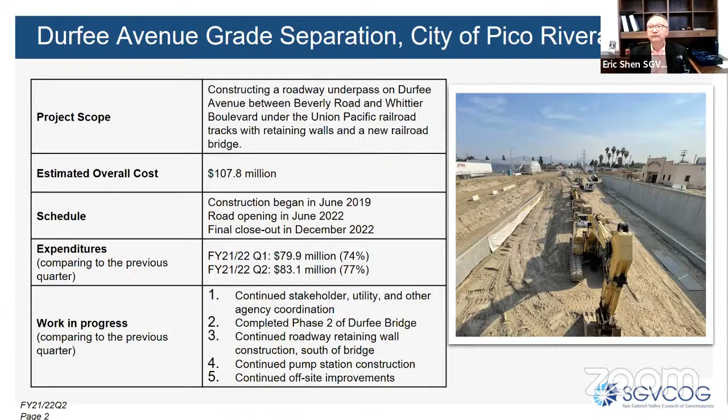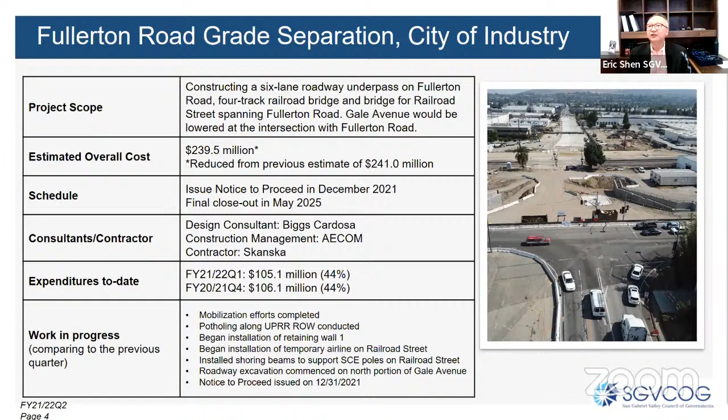Oh, actually, that is my last report. So with that, I'll be glad to answer any questions you may have. Otherwise, this item is for receive and file.

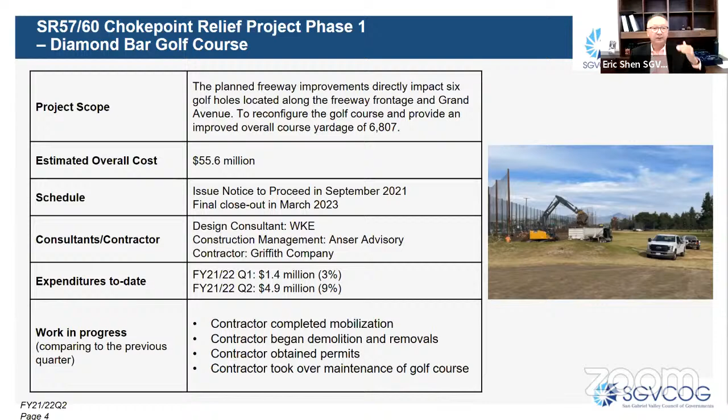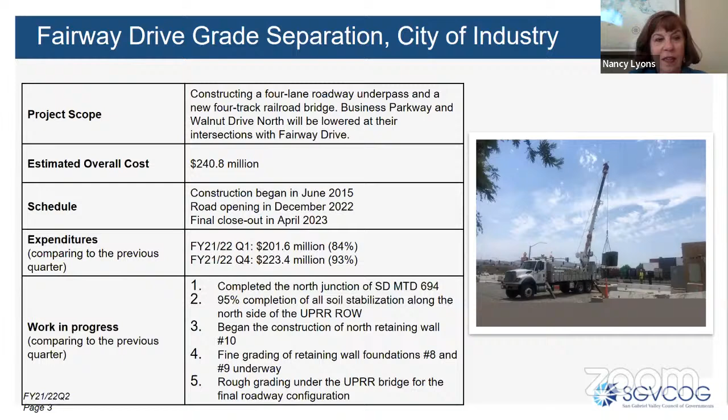Certainly, certainly. Thank you very much for the comments. All right, I see no other hands up. Does anybody else have any questions on this? No.

I will ask if on Fairway Drive it might be time for a site visit, since we are close and we love site visits. We'd like to see it, so perhaps we can take a look at that before the weather gets too hot. We will definitely take into consideration. I will ask Charlotte to work with you on your schedule and with our new project manager. We love to showcase our progress, to give you the assurance that big, important work is being done under your leadership, so we'll come back to you with some suggested dates and times. Very good, I think the committee would enjoy that.

And then if we could go on to item 8. The next item is on the quarterly mitigation monitor report. Staff has provided you with our regular monitoring as well as the tracking on the activities. In the interest of time, I will be glad to answer any questions you may have. Otherwise, this item is for receive and file.

Are there any questions? Diana, you still have your hand up. I'm thinking you just didn't lower it, is that right? I'm done, sorry. Okay, thank you so much.

Yes, let's go ahead then to the monthly report from you. Thank you, Chair Lyons. I would like to mention, in addition to the written director's monthly report, I would like to just emphasize that...

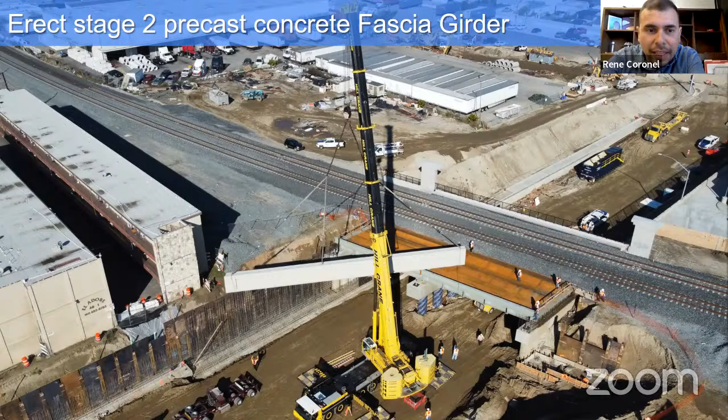After that, we just have to backfill and do the lettering for the city of Pico Rivera. Next slide.

In this photo, we are pouring concrete for the retaining wall, stem wall. Once we pour the concrete, we're going to wait a day or two and then strip the forms. That's what you typically see on the grade separation, those long vertical walls. Next slide.

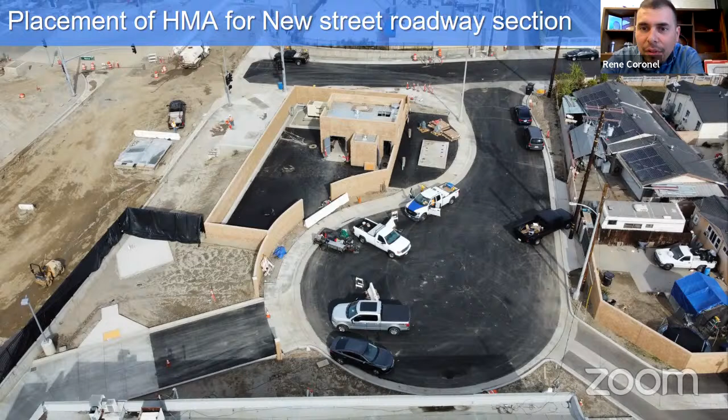On this picture, we completed placing hot mix asphalt, HMA, for New Street. That building right there, we're continuing to work inside - it's hard to tell from this photo, but it's a pump station, and that goes 3 stories deep. So we are putting the last finishing touches on the roadway sections. And the last slide.

We're working on both sides of the street. In this photo, we are placing rebar and the forms for the retaining wall footing. Once we place the concrete, we're going to start building the stem wall, which we did on the other side. And that concludes the presentation for Durfee.

I believe next one is the Diamond Bar Golf Course. Okay. So for the Diamond Bar Golf Course project, we are also continuing construction.

In this photo, we are doing biological surveys, so we have to make sure there's nothing in the trees before we remove them. And it takes a lot of visuals to confirm. Next slide.

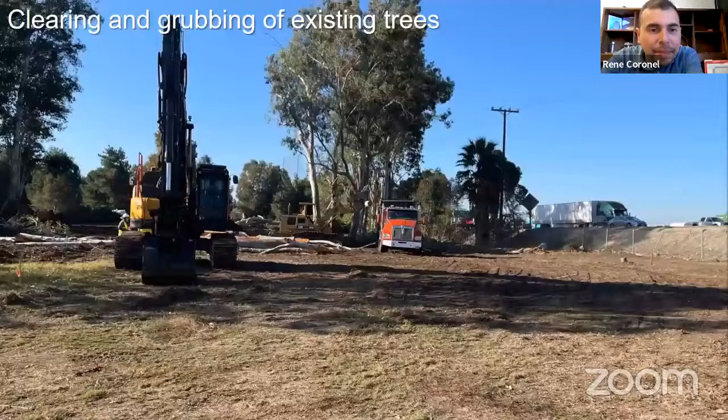We're also - if you've driven there, you've noticed there's a lot going on. We have been removing a lot of trees, a lot of dirt, a lot of grass, and we're hauling a lot. Next slide.

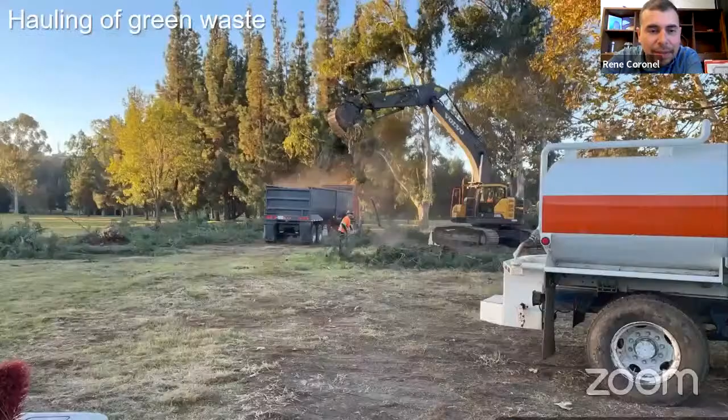Yes, just loading, dumping green waste, taking it out, hauling it, and we're working with the city to make sure we're following the shortest haul routes. It's pretty convenient because the freeway's right there, so we're not impacting the local residents. Next slide.

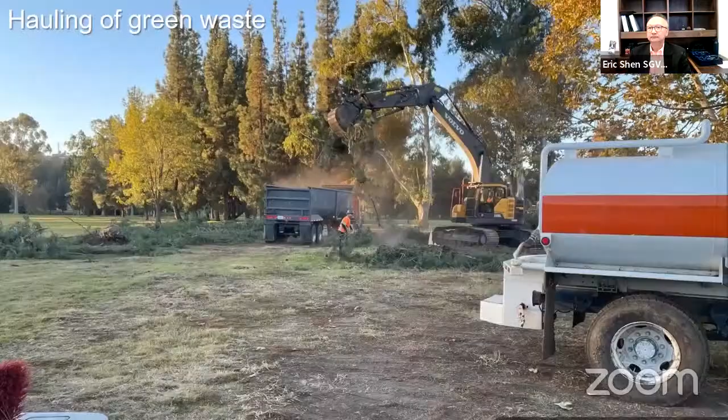And that concludes. I can take any questions. Next, Charles, Fairway Project.

Charlotte, can you advance to the next one? There you go. You are looking west, standing on the north side of the UP right-of-way. Contractors are doing the fine grading, in preparation for retaining wall number 9, which is like the middle portion of the project.

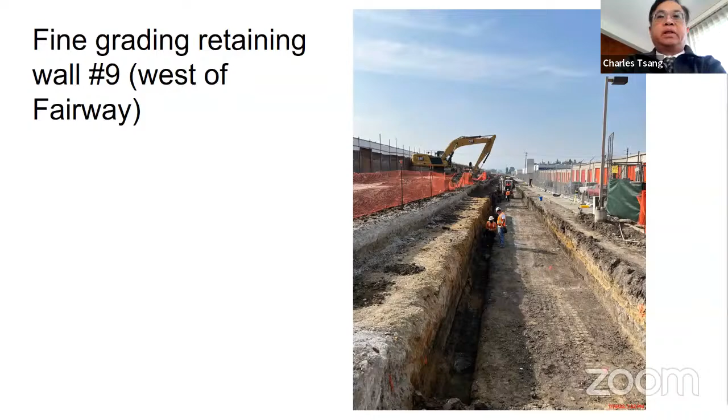Next, please. And on the left picture, you are looking east, also standing on the north side. You see the contractors putting in the rebar cage - that's for the retaining wall foundation for the north retaining wall. We are bringing in a lot of rebar to the job site since late November and the month of December, and this process will continue on for the next 2 months at least.

And the picture on the right-hand side, you are looking east also. This is retaining wall 10, so they are building these retaining wall foundations, rebar cage on site. Next, please.

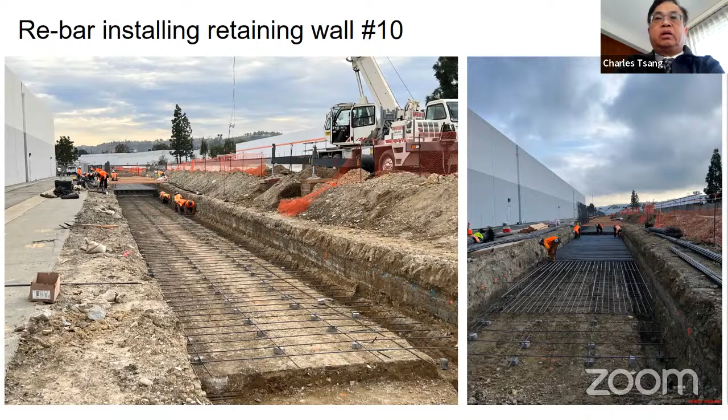Like I mentioned in the previous reports, contractors are using kind of a production line type strategy. So when you see one end, they are doing grading, the other part they are doing rebar cage, and then in some other area they are pouring concrete foundation.

So this is the area pretty close to the grade separation bridge area. They are pouring foundation on the left-hand side, and on the right-hand side pictures, they are pouring the foundation as well. You can see there are different crews in different areas working one following the others. Next, please.

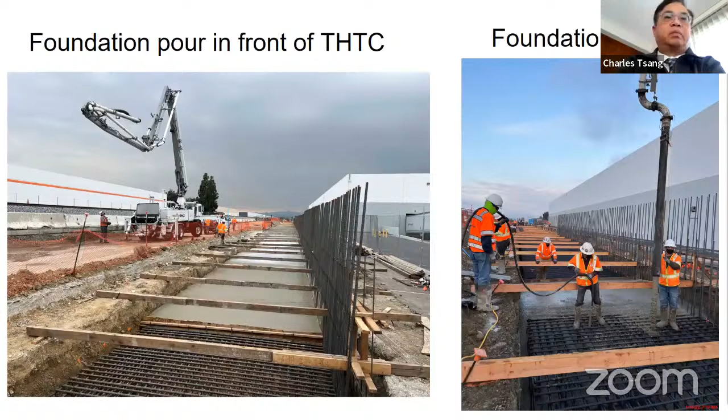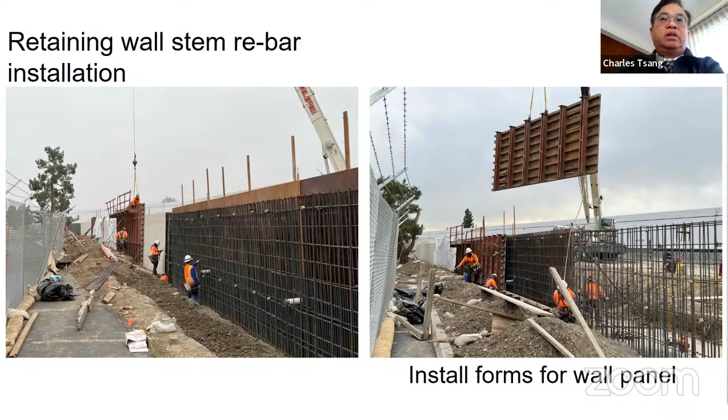The picture on the left is the far end, close to the east end of the project limit. The wall stem has been built, and the contractor is stripping the forms. When they strip the forms from one side, they're putting the forms on the other side right away using the same crane. That's how they can efficiently construct the wall stems. So when you go out there, the majority of retaining wall 10's wall stem has been poured, just waiting to strip the forms.

Now this is another area where they put up the form, and they are ready to pour the wall stem. I think this is the last slide that we have, and I'll be happy to answer any questions if there are any.

Chair Lyons, if you want to come and visit the site, I think towards the end or late February will be a good time, because the majority of wall 10 will be poured and the contractor will be cleaning up. You'll still see some activity on wall 8 and wall 9 going on.

Thank you very much, but where will you be? I'll be moving on to phase 3 of my progressive retirement. I'm just trying to point out that we will miss you at that site.

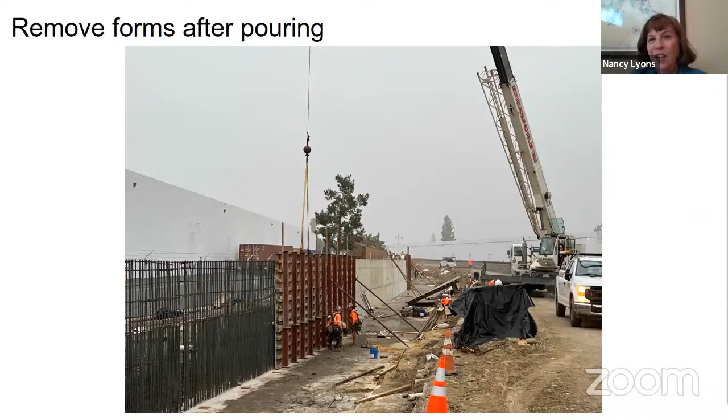But before we get into that, does anybody have any questions? Any members have any questions on this? Chair Lyons, we have one more project update. Well, let's do that one. So we're saving the last for the best. Andres, please proceed.

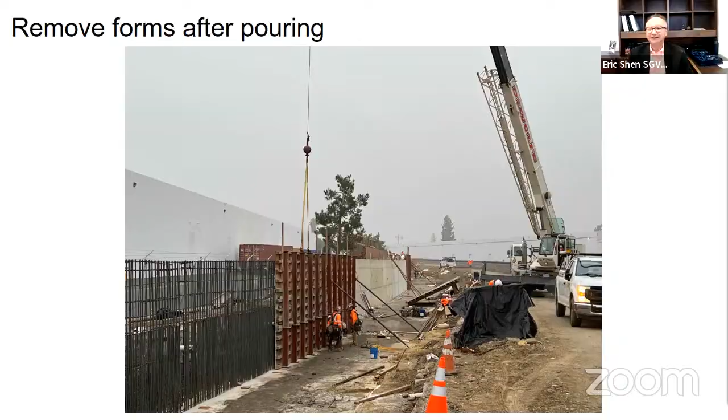Good afternoon, members of the committee. I'll give the update for the Fullerton Road grade separation construction project. There has been a lot of progress made in the last month. If you go to the next slide.

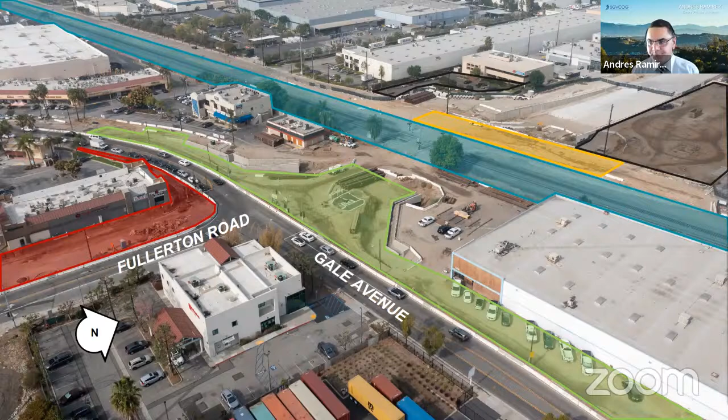Up in the areas shaded in orange, we are using the area on the right as our stockpile area, and we're breaking down all the removed items. Over in front of the Lee and Rowe property, on the left orange side, we went onto the property and potholed for all the utilities in preparation for the demolition work that's going to happen there. If you go to the next slide.

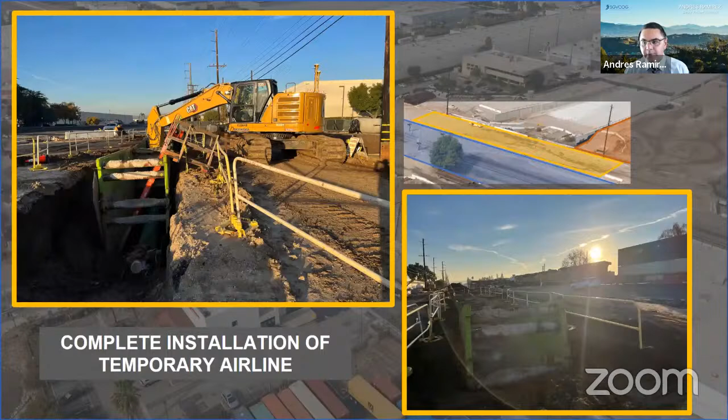Just south of that on Railroad Street, which is the yellow area there, we installed a 30-inch air line. We had started that last month, but we completed it this month. Next slide.

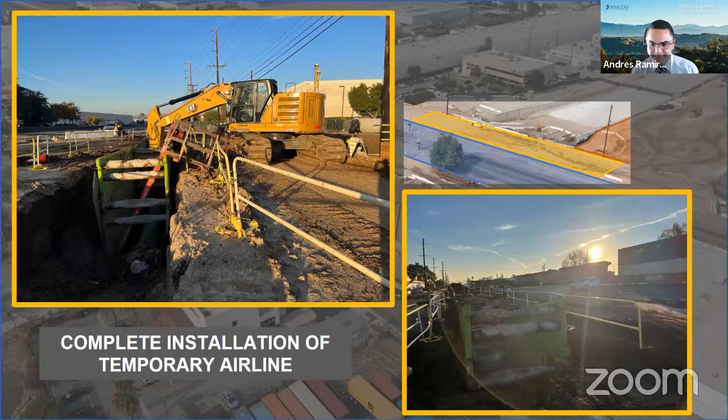On the railroad right-of-way, we continue to do a lot of locating and testing. We located all of the MCI handholes—these are fiber optic lines that were relocated under the previous contractor, but we had to go in and locate where the boxes were actually located so they didn't interfere with our construction. We also did soil sampling along the entire portion of the UPRR right-of-way for any contaminated soils. Processing that information will probably take about a month to get results back, but that work has been conducted. If you go to the next slide.

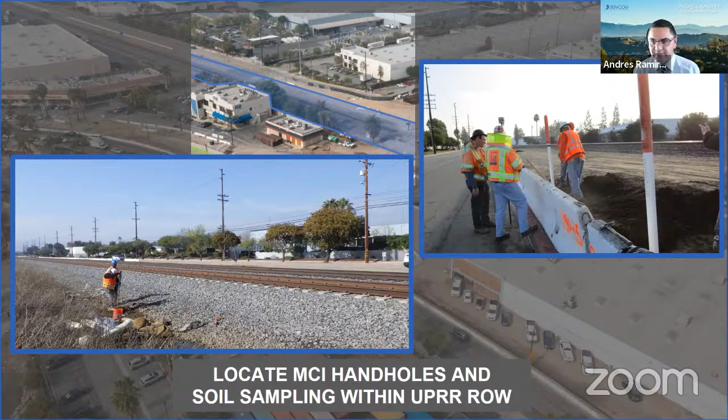A lot of the heavy work that's gone on is on Gale Avenue. That has been our focus because we want to reopen Gale as soon as possible. Standing here on the lower part of Gale, pretty much at the intersection of Fullerton and Gale, you're looking east on Gale, and you'll see the office building we're using. You can see the difference in the grade of all the soil that's been taken out. That's what we've basically been working on—lowering, doing roadway excavation to lower the road to grade.

On the right-hand picture, just outside of our gate, we also removed the portion of the road on Gale in front of Lindsay Toys, the property adjacent to the site, in preparation for relocating the curb and gutter and then reinstalling the road there. If you go to the next slide.

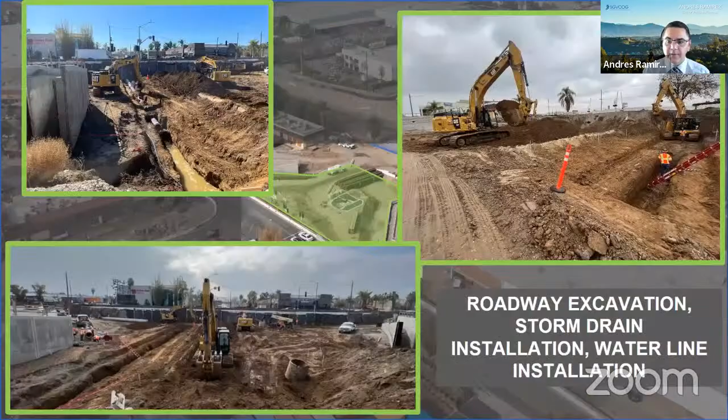This is right smack dab in the middle of the intersection of Fullerton and Gale. In the top left picture, you're standing up on the higher part looking south along Fullerton. You'll see a lot of roadway excavation work that has been done—a lot of the soil has been removed. We also already have the Rowland Water District in there installing their water line.

On the right, you'll see this is pretty much the same area, but you're down in the pit with the roadway excavation. The bottom picture gives you a perspective of all the activity going on just in this one area. You see in the background the shoring wall. The top of that shoring wall is where the road is. So behind that white K-rail is actually the elevation of the road of Gale that is currently in operation right now.

Next slide, please. This is just the western part of the same roadway excavation that you see. We also poured a slough wall at the end of retaining wall 2. We formed and installed the retaining wall that holds up the ADA sidewalk that's going to go behind that wall.

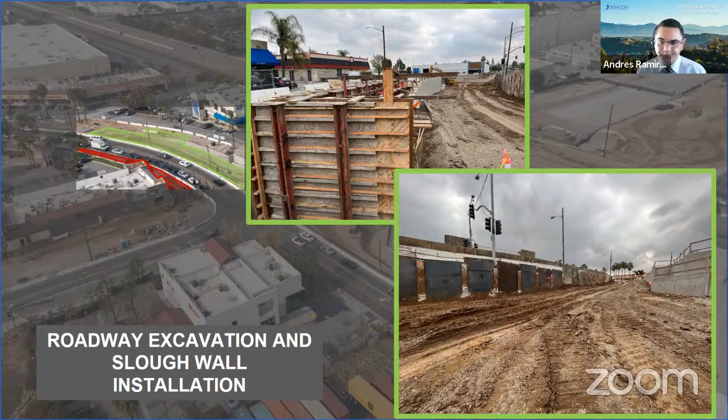Next slide. So this area here is across the street of Gale, on the southwest portion of the intersection. What we did there is install the temporary shoring. You'll see in this bottom right picture, on the left, the temporary shoring wall. And on the right, we installed the temporary shoring wall in order to start our roadway excavation. You see how much of the road we've already taken out, again in preparation for the utilities to come in, and then we'll put the new road back in.

I believe that's all of my photos. So I will be happy to answer any questions if anybody has any.

I'll bet member Corey Moss has a big smile on her face that there's a lot of activity here, because I know this has been a big concern for Mayor Moss and her city.

I definitely do. Unfortunately, I had to move from my computer to my phone because I've been moving around trying to do some things. So that's why I'm off camera, but absolutely very, very excited to see this much progress. And thank you for pointing that out, Chair.

Well, I know when we were there, I think it was 6 to 8 months ago on that sweltering day, there wasn't a whole lot going on. And now it just seems like there's a whole lot going on. So the committee's very happy about that, and those of us that live adjacent to it and want to support those businesses are very happy about that as well. Yeah, I'm extremely grateful to staff and everybody else, and that is quite a relief. So thank you for that.